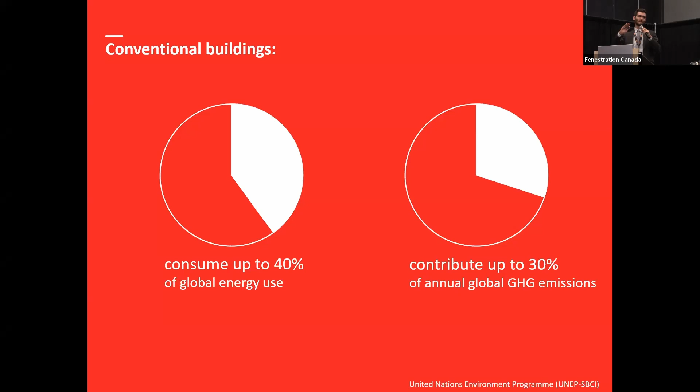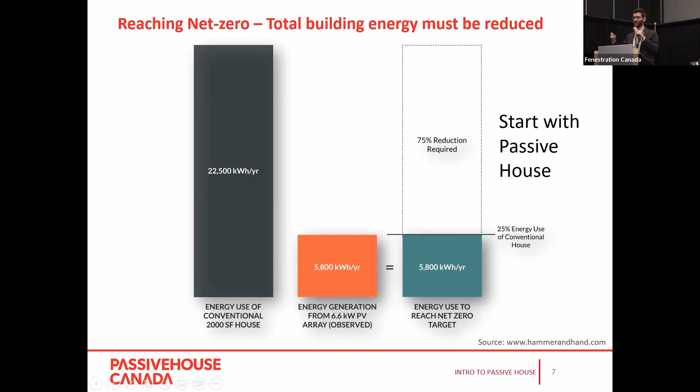Building off of the shrinking demand piece, a new part of the energy use discussion these days is this term net zero, not 100% perfectly defined. Different people use it in different contexts. People talk about energy, people talk about carbon, but no matter how you're talking about it, if your intent is to get to zero, whether you allow people to generate on site, force people to generate on site, or buy renewable energy credits, separate discussion, the easiest way is to bring your demand down.

That was me. Sorry. All right. Sorry. Okay, back to it.

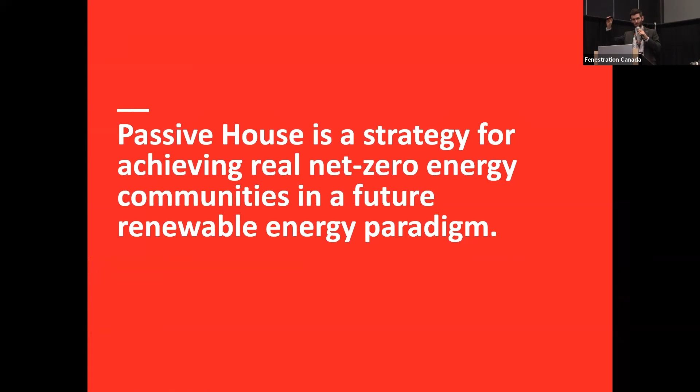So if our goal is to get to zero, passive house is an excellent path to get there, right? It doesn't by itself require us to be at net zero energy, but if that's somewhere we want to go, passive house will get you there a lot easier than starting from, let's say, a regular building.

If we were doing a full passive house intro course here, we'd go one by one through all of these principles here. But, seeing as this is a window and door conference, the one we're going to focus on today is this one here, windows. All of these are important.

And when we combine them all together, they all add up to delivering us those outcomes that we were talking about of crushing the demand, shrinking the amount of energy we're using down from our typical building energy use down to the 15 for space heating and the lower values for everything else as well. And windows is a huge component of that.

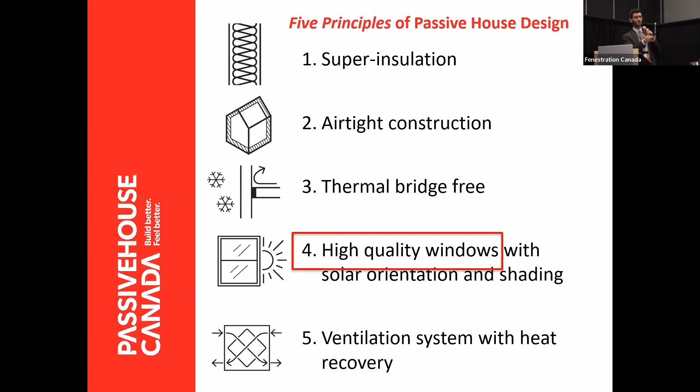So just a little bit of context about the types of projects. One of the things that people hear when they hear passive house is they hear the word house in it. It's a bit of a misnomer, I guess, or it leads people to think it is one thing when it is not necessarily just the one thing. You can do a passive house single family build. Absolutely. There's a ton of them across Canada, but it's not only that.

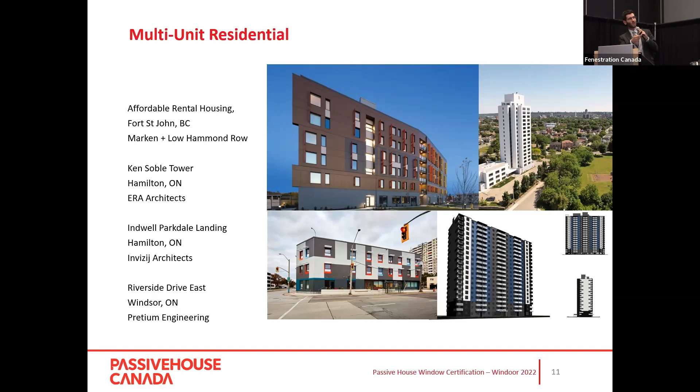These are all passive houses. They're not the typical image that some people get in their head of just a boring gray box with no windows. Obviously, you can have your architectural design features and still meet your performance requirements.

So diving a little bit into the windows specifically. At a high level, these are the requirements we're trying to hit. Passive house for windows, or the certification scheme for windows, is based on this climate zone approach. So within each of those climate bands, and you can see the map at the top left there that gives you a rough idea of where the bands fall more or less. It's not 100% accurate because elevation changes and proximity to water can influence things some, but roughly speaking, that's where the climate zones are.

Within each of those bands, we have the same set of requirements for each climate zone, but the stringency or the difficulty of hitting those requirements is ratcheted up as we get into the more challenging climate zones. In Canada, these are the two that the vast majority of the populated area of Canada fall into. The cool temperate, so that'd be like Toronto, Vancouver, a lot of the GTA. As soon as you move outside of the GTA to Barrie, London, up into Montreal, Alberta and those kind of places, it's by and large cold. And then, of course, when you go up to Northwest Territories, we fall into the Arctic.

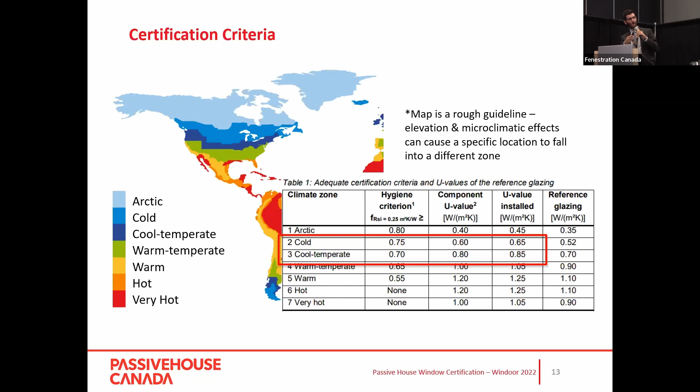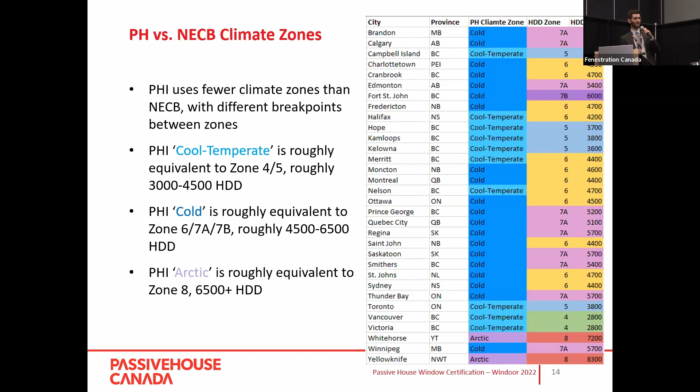And there we go. And just a little note on the climate zones. It's a bit of an information dump here, but just because I know not everybody thinks in passive house climate zones like I do, you can see a bit of a reference there into NECB or how NECB classifies climate zones instead. So you can see it's not a straight one-to-one where the boundaries fall. The Passive House Institute kind of draws their lines of climate zones a little bit differently than we do, but roughly speaking, there's some figures to sort of situate you if your mind works in that way.

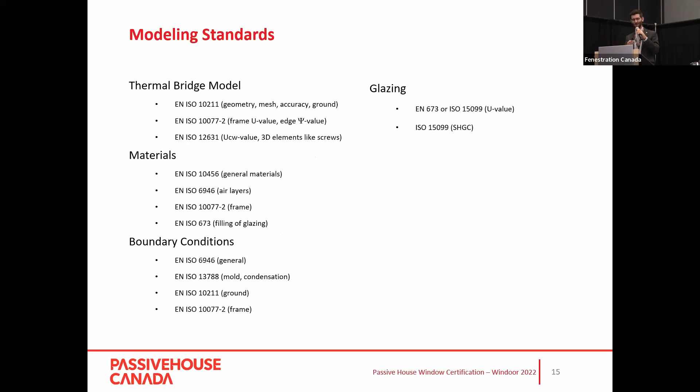And just a note on some of the modeling standards. If there are modelers in the audience, I think there might be a few, some people like to see some of these standards here. That's what we're going to use to, oh, okay, this is the slide that got messed up. There we go. To determine these values here.

So the certification of windows, this is one certificate on the right here. Certification for a window is going to follow or contain assessment of those three values that we can see, which relate us back to the chart that we saw with the map earlier. The primary one is that comfort one. So we saw the comfort requirement, the U value requirement at the top. The text is a little bit small maybe, but the UW installed, so both the window on its own and then the window as it's actually put into the wall.

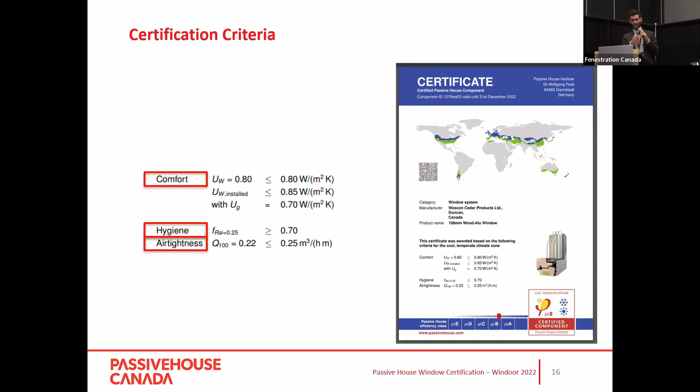This is something that differs from some other assessment schemes in that we can take a really great window, and if we put it in a wall and we don't really consider how we're doing that and think about thermal bridging through that install, we can kind of take a good product and waste some of its potential by not installing it in the best way we can. So part of the certification scheme for Passivhaus windows is to not only model the window on its own, but also model at least 3 different verified installs. Hygiene criteria, which we talked about, and then airtightness as well. I'll break those down as we go.

A little bit of the theory behind the numbers that we're looking at. We've been talking a lot about numbers so far, but really, we know that buildings are for people, right? And these numbers weren't just picked out of the air. These numbers were picked to deliver comfort, to deliver satisfactory indoor spaces or really exceptional indoor spaces for the occupants.

So we know that with, let's say, a typical window, I've got an example up there of a U value of 1.6. In these design conditions, we're making some assumptions here about if it's -14 outside, we end up with a really high degree of temperature asymmetry between our interior surface temperatures, like our interior wall, and the feeling of cold that you're radiating to that cold window. Everybody's felt this. You go to a restaurant and you sit by the window and you feel really cold, right? The surface of that window is really cold. It's not a comfortable space to be in.

In this example, we've got a radiant temperature asymmetry of 5.5 degrees. That's enough that you can feel it. You're not going to be comfortable. You need some kind of compensating heat source near that window to maintain comfort. Usually, it's a radiator of some kind or warm blown air that's pushed towards that window to really make up for the fact that it doesn't have the performance to keep you comfortable by default.

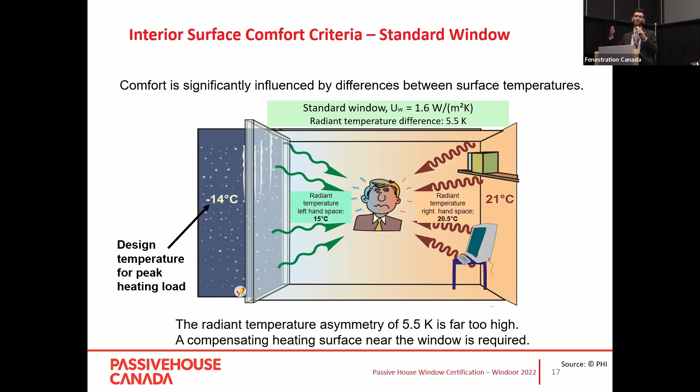If we then look at, let's say, a Passivhaus certified window of, in this case, that 0.8 U value, which is appropriate for a cool temperate climate, the temperature of the window is not going to be the same as the interior surface temperatures on the interior wall, but it's going to be a lot closer. The difference between the two is going to be a lot lower. And when we're talking about this roughly 3 degree Kelvin or degrees Celsius temperature difference, that's a level at which you're not going to notice it in the same way. You're not going to sit there and feel, I'm uncomfortable, I need to keep my coat on sitting at dinner or whatever it is.

So with this kind of thinking in mind, where this is sort of the end goal we're trying to get towards, the numbers that we saw in the previous chart were chosen to say, we know that within these temperature zones, if we specify components at these specific performance levels, we're going to achieve these outcomes, right? We're going to achieve these higher surface temperatures. We're going to have people comfortable. We're not going to need to put the heating system right next to the wall.

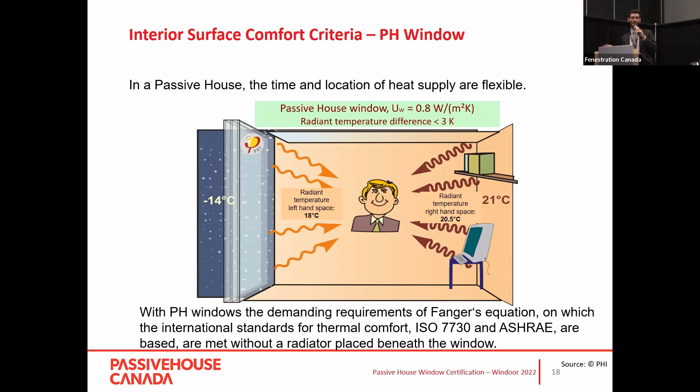We're not here to talk about heating and cooling systems today, but the sort of knock-on effect is it changes how we need to specify or to install our heating and cooling. We don't need to necessarily run perimeter heating around the entire building, for example, or put a grill at each window, like a lot of times you have to do in standard construction.

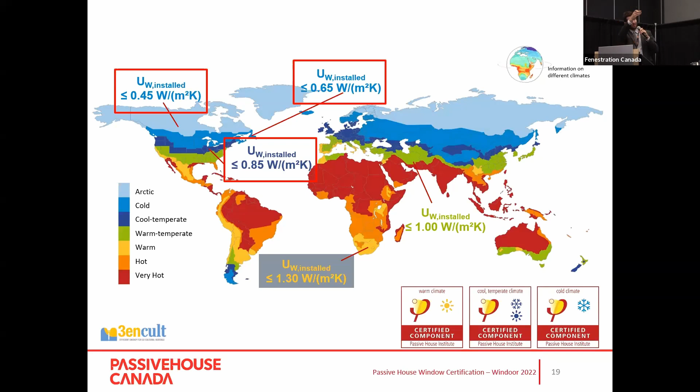And just to bring it back again, because I'm throwing a lot of data and numbers out there, I wanted to put these numbers back up again. So the numbers that we saw before, these are the same ones, just pulled out of the table and put against those climate zones that we have in Canada.

Okay, so some details about how we are actually calculating those numbers that I just showed on the last slide. So we've got the 0.85, 0.65, and 0.45 for the different climate zones in Canada. It's a big, long calculation, and it looks very intimidating, but it's pretty straightforward when you break it down element by element. So the first one is the U value of the glazing times the area of the glazing. We also add in the psi value of the spacer separating the panes of glass.

In this image, this is a double pane window. In Canada, if you're going for Passive House, pretty hard to get away with double pane. I don't know that I've personally seen a Passive House project here in Canada that did double pane. There might be one, but usually it's triple glazed. But in either case, we're adding the psi value of the spacer times the length of that spacer around the perimeter of the window. We've got the performance of the frame itself. So the U value of the frame times the area of the frame.

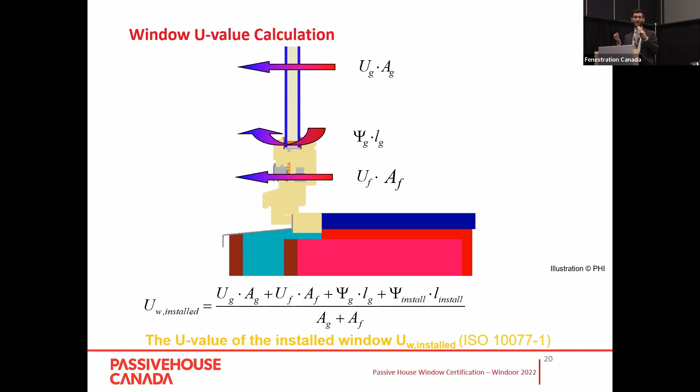And then we've got the psi install value, right? So this is the piece that we were talking about. The install, if we've got a really, really great window, but we don't install it very smartly, we can have a lot of thermal flanking, a lot of thermal bridging. It kind of negates the value of a good window in the first place.

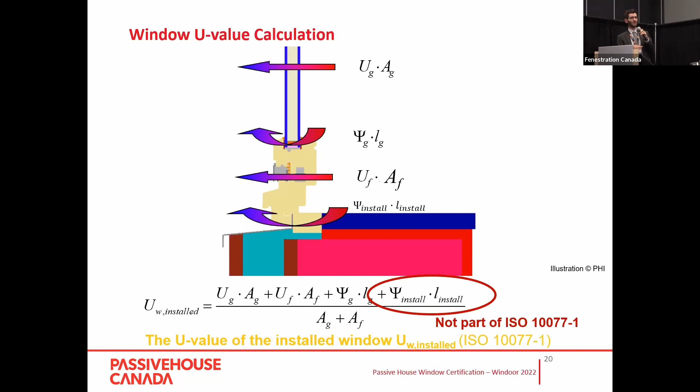And what do we need to take away from that equation? It's a lot of theory, a lot of numbers and math, but what does it take to actually get us there? So you can see the really important parts of the equation are: one, a good spacer, right? This is a spot where traditionally we lose a lot of heat. It's almost always the coldest spot on the frame. So any improvement we can do at this spacer, it runs the entire perimeter of each pane of glass, so it has a really, really big impact.

That's number one. Number two is a slim frame. This is not mandatory, but when we're calculating out the overall performance of any window, the glazing is going to perform better than the frame. So if we can maximize our glazing area, we've got potential for more solar gain, which in most cases in Canada is good. Not always, we need to be mindful, but we've got better views to the outside. We've got more potential for solar gain, and we've minimized the area of the relatively poor performing element, which is the frame.

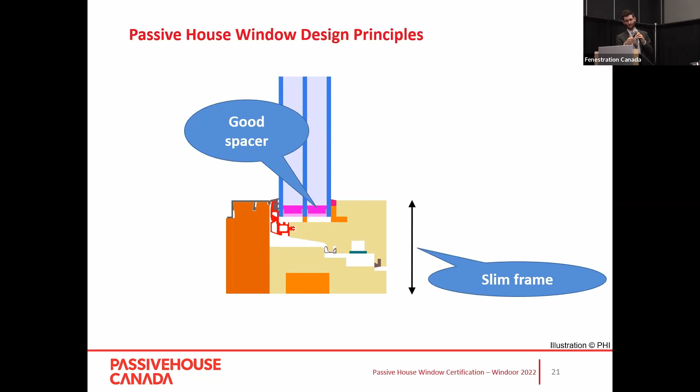And whatever frame we do have, we want to make sure it's well insulated. This example is a wood frame, the sort of lighter yellow, and the orange is insulation. Not every frame is going to look exactly like this with that continuous exterior insulation. You see this mostly on wood frames, but whatever type of material you're using, you're going to want to make sure that it is fully insulated.

Just want to do a time check. Okay.

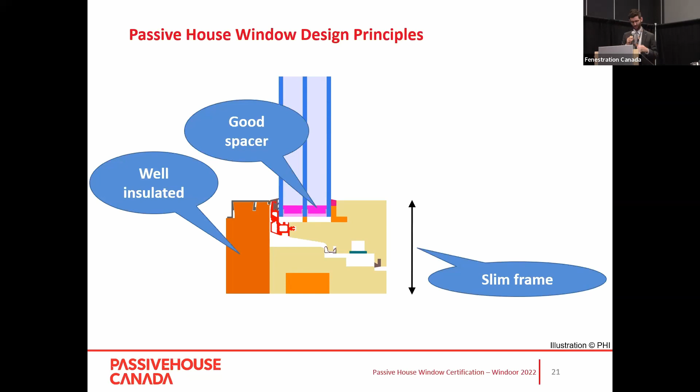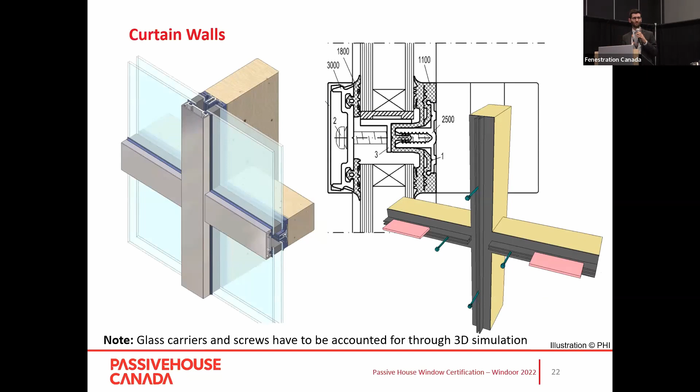And then just a quick note about curtain walls. Obviously, there are more elements to consider with curtain walls: glass carriers, screws, things like that. Those didn't appear in the equation that I showed before, but if we're talking about curtain walls, these elements are going to be added into the equation as well. They're going to be accounted for, in addition to everything else we've already talked about.

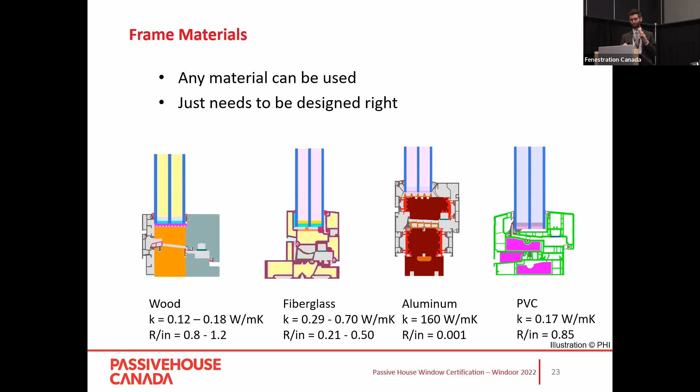Okay, so a little bit of detail. Let me.

Oh, okay. Our controller's having a bit of issues.

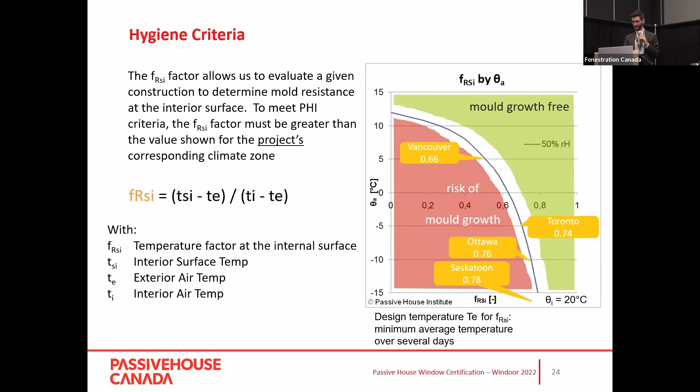That's maybe a bit of a wordy way of saying it, but essentially this is assessed both at the project level and at the component level. So I know that most of the folks here are in the window industry. So I wanted to put this up just to show that there's a difference between the component certification and the project certification. A project needs to adhere to its location-specific climate data, whereas, let's go to the next slide, maybe make it more clear, the window frame certification, the component certification, has to adhere to those climate bands that we saw before.

So when people are talking about passive house projects, how do I say it? Every passive house project has its own building-specific energy model built. And that energy model situates the building in its exact location in the world. For components, we know that they're specified across multiple projects. And so any assessment that's done on the specific project level isn't necessarily going to capture what might happen, say, between Toronto and Vancouver. Technically both are in the same climate zone, but obviously have very different design conditions.

So the important takeaway for manufacturers is that we've got these breakpoints based on the climate zones, as opposed to saying we're certifying our component for Montreal or for Toronto or for Vancouver. It's for an entire band, an entire zone that's going to contain multiple cities, perhaps.

Oh, you've got to go upstairs to 210.

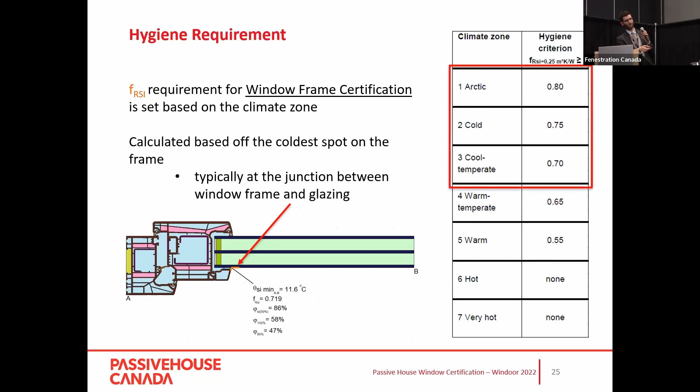Okay, we also had a piece on airtightness. I'd be interested to hear perhaps during the Q&A. This is not my area of expertise, this airtightness part. I'm more on the modeling side and the comfort side. So I'd be interested to hear if anybody does have any expertise in this. But to my knowledge, for the airtightness standards in the EU and North America, I'm not aware of any direct comparison or way to convert them. Passive House was originally a European standard, so their documents tend to refer back to the EN standards, the European standards.

But the important takeaway for airtightness is that pretty much every passive house window frame is going to be triple gasketed. This serves two purposes. One is airtightness. It gives us a belt and suspenders approach to our airtightness. We've got another seal there, sort of a backup. It also splits up the air cavity in these operable frames, which from a thermal perspective gives us a pretty big boost because it shrinks each of those air cavities. There's less possibility of convection within the cavities. And we see the performance actually go up on the comfort side as well.

Taking it back to the project side, which I talked about a bit earlier, every single passive house project that is built is going to be blower door tested. That is part of the certification requirements. That's reported, that's fed back into your energy model and reported out for certification.

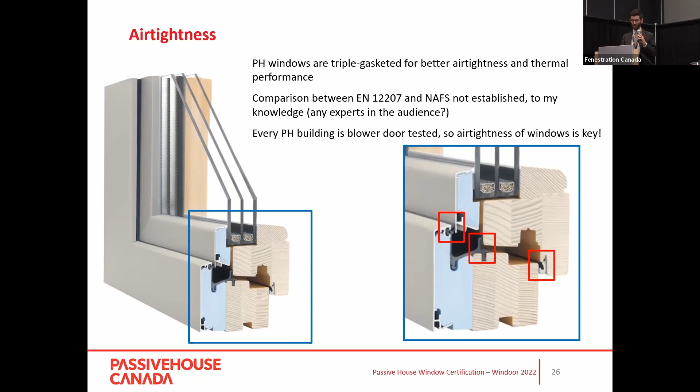In terms of the actual process of certification, it depends a bit on where the manufacturer is at. Most of the time, in my experience, manufacturers have an existing design that is either close to or not meeting the passive house requirements. But there will be some design that starts us off, and we would take the existing design, put it into our energy modeling software, get a sense of where it's coming out on these different metrics that we've talked about, and take a look if it's meeting the criteria.

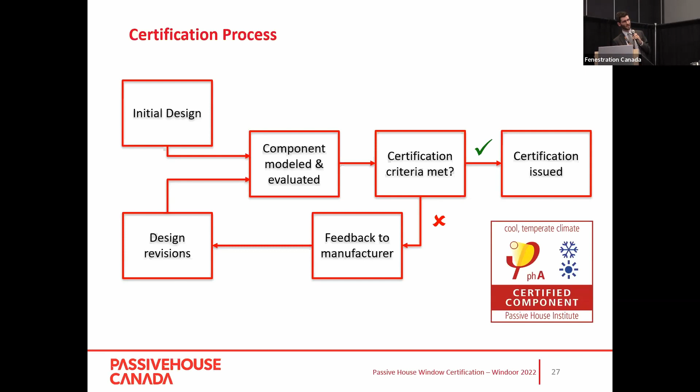Again, in my experience, it usually isn't the first time. There's usually a bit of iteration that's required. So we need to circle back to the bottom there, provide the feedback, revise the design, and then model and evaluate the new design. But once all the modeling is complete and the documentation is complete, that gets submitted to the Passive House Institute in Germany, and they sign off and provide the component certification and certificate, as well as the seal that you can see an example of at the bottom right there.

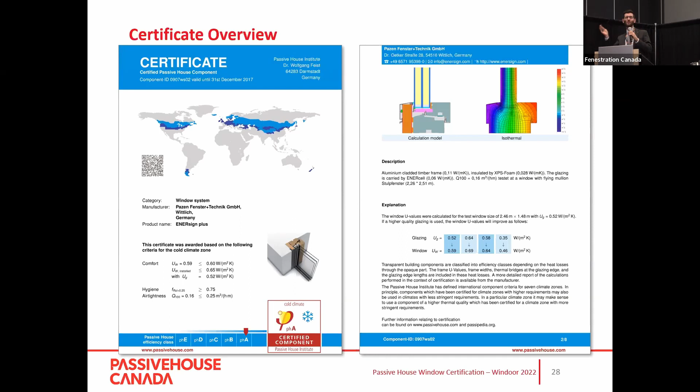The certification is necessarily done with a standard glazing to sort of remove that as an element, because what we're testing is the window frame itself. But we know that in reality, of course, different solar heat gain coefficient glazings, different types of glazings are going to be used. So we want to get a sense of where does this window come out with these different combinations. And those are listed there for informative purposes.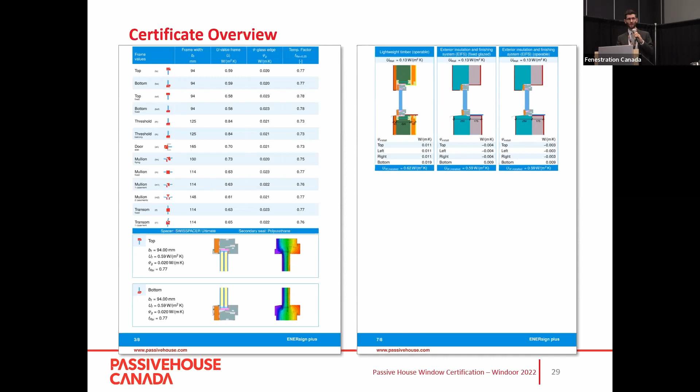But what this gives us is a set of standard psi values, if people are familiar with that terminology from thermal bridging analysis. So that's an assessment of how much extra energy are we losing through that install. That's included in the certificate as well. And project teams will have access to that data right from the get-go to start throwing that in their energy model, so they can see what's the impact of using this window versus that window right away.

Just a little bit of further info about certification itself. We are seeing an increasing number of projects, both in Eastern Canada and across Canada as a whole. Certainly, I'm based in Ontario. I'm seeing this rapidly picking up traction: projects that are specifically requiring Passive House certification or performance proved to Passive House methodologies as part of their request for proposal. If you want to bid on this project, you need to be able to demonstrate your performance as per this methodology that we've sort of been talking about today.

In addition, I kind of hinted at this with the certificate, but a project team that is looking to design a Passive House, the quicker they can get their model up and running, the quicker they can get a sense of whether a product is going to work or not. I showed the 5 principles of Passive House earlier on. It's a balance, right?

There's no specification that says you must do this, you must do this, you must do this. It's not like code minimums, you need this R value or whatever. It's the building needs to meet this outcome, the really reduced space heating that we showed before. If you want to do a little bit extra on your walls and then give a little bit on your windows or vice versa, you do have that flexibility.

But the only way you can start making those decisions is if you have the energy model up and running and you can start comparing your different options. So any component that is certified is added to the database, the product database.

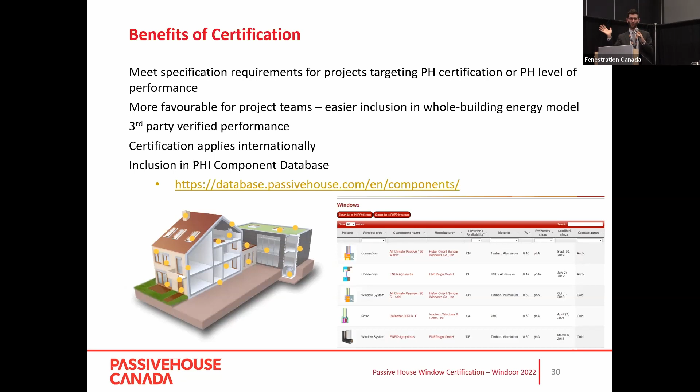And, in terms of leading on from that discussion of benefits of certification, something that Passive House Canada is going to be offering in the new year is a brand new modeling course that is really manufacturer number one and consultant number two focused, but it's specifically about modeling windows to Passive House methodology.

There are some people across Canada that are capable of doing this work right now, not a whole lot. And what we want to see is more people that are able to undertake this analysis. When we receive submissions from manufacturers, usually we have to do the modeling ourselves, and it adds more time to the process. If we want to increase the speed with which new components become available, this was one of the needs that we saw.

So we're offering training to anyone that is interested, but again, specifically focused on manufacturers, to go through in much more detail. We've only got half an hour here today, but this is going to be a four half-day course going through all of the details of boundary conditions, modeling approaches, conventions and requirements, details of all the standards,

the use of the modeling software to enable manufacturers and consultants to do this analysis beforehand, do it upfront, do it early, and start getting a sense of where their performance is at to short circuit that journey, let's say, to make it a lot quicker than it has been.

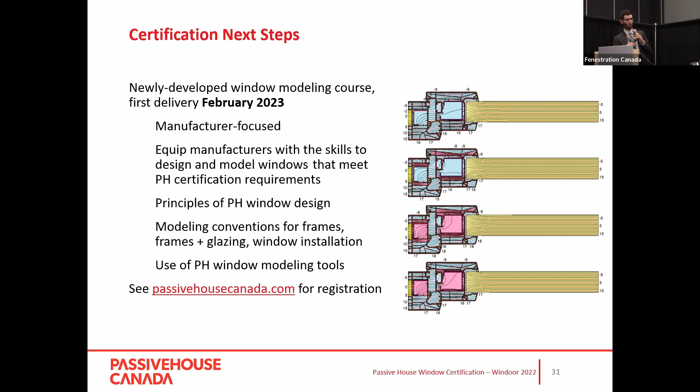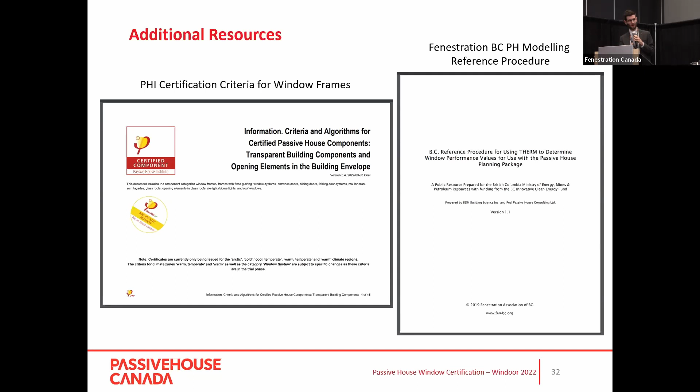Okay, and that is all I have. Thank you very much. Questions for Cameron?

Cameron, thank you for an excellent presentation. You mentioned in your presentation the difference between Passive House certified windows and the certified project. I am representing Inline Fiberglass. We have a certified window. You possibly were involved in it.

And on the project itself, our high efficiency window, after the test, might have no efficiency at all because of the installation. Now, is there any approach to train the trade people to do the proper installation? Because we're facing this, we don't have a crew, and a union crew is required, especially for government projects. So is there any pressure or any program for the installers to go through certification?

Yeah, so just to summarize the question, it was about whether there is training available for tradespeople, for people that are working on site, to make sure that even if we draw a great detail for installation on the computer, it's carried out on site. That's a great point. Yes, absolutely.